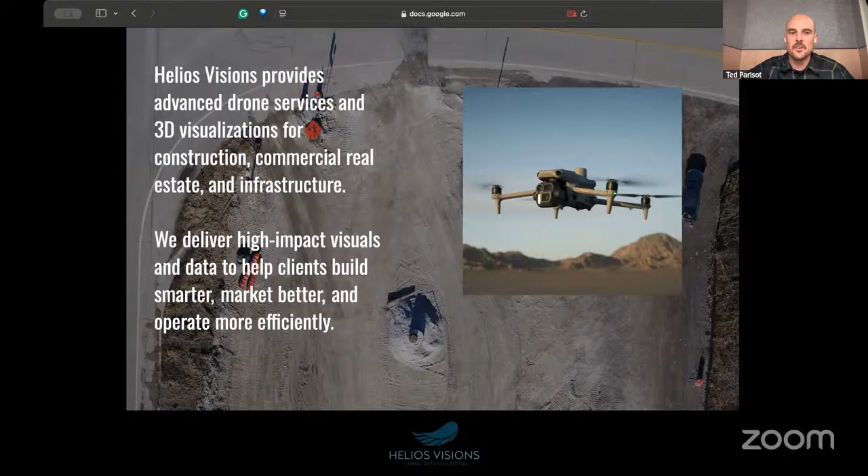So just a little bit about Helios Visions. We're an advanced drone services company. We specialize in 3D visualizations and inspections for commercial real estate, infrastructure, construction, and engineering. We want to deliver high impact visuals and data to help our clients build smarter, market better, and operate more efficiently.

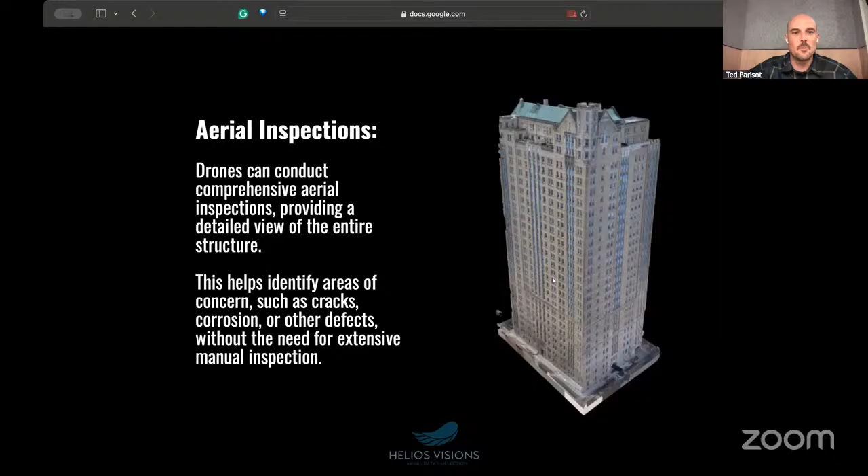So as you may know, drones are used very often for aerial inspections. The use has increased a ton over the last few years with the number of cities having facade inspection ordinances. Drones are really replacing or supplementing those inspections, being able to cover the entire building as opposed to spot inspections or only capturing a small part using traditional methods. So I'll show a quick video of a short view of what a drone-based facade inspection would look like.

This is a building here in Chicago, from a few years ago. That's the M300 taking off there, and we stay pretty close to the building, capturing images with enough overlap to create a 3D model. In this case, we're using photogrammetry to merge all this together, covering the entirety of the building.

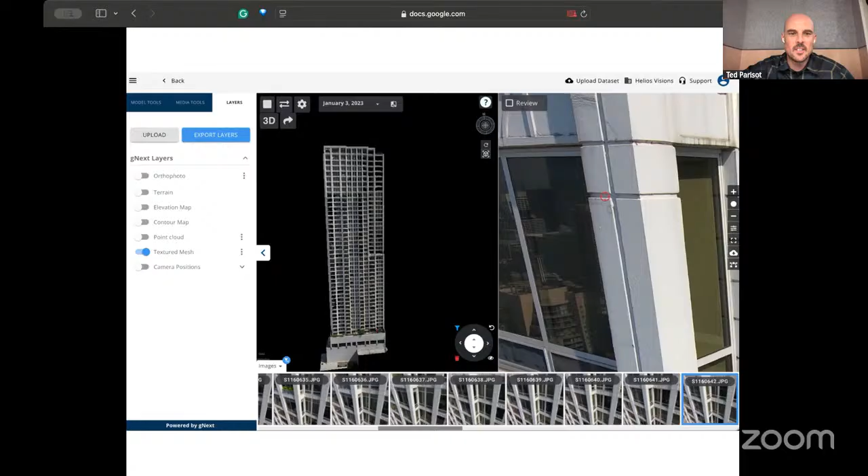Those images are used to create a large 3D model and orthomosaics, which engineers use to mark up the building and plan for repairs. Here's an example of this in a software called GNext. We're able to merge all those images into a large 3D model and then use that model to navigate the images, check conditions, make annotations and measurements. It's an easy way to assess the building without having to be on a swing stage, rope access, or lifts.

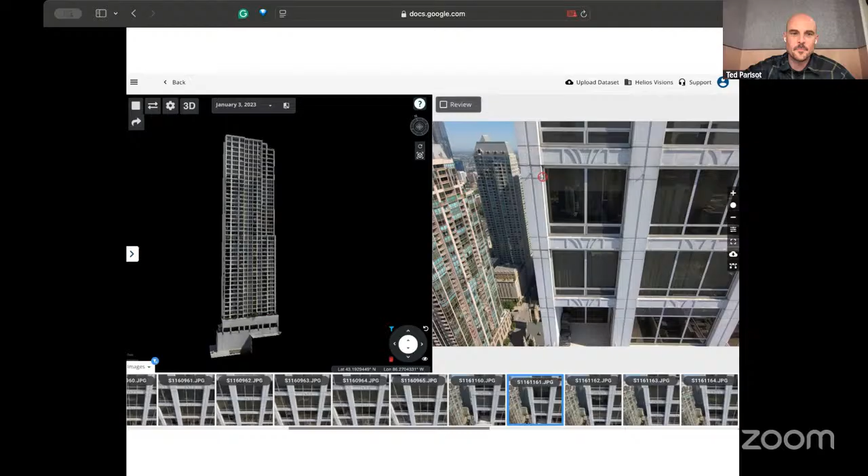Here's another example of drone inspection data of some buildings. You can see this is just a large ortho image, and we're able to capture this in a pretty short period of time.

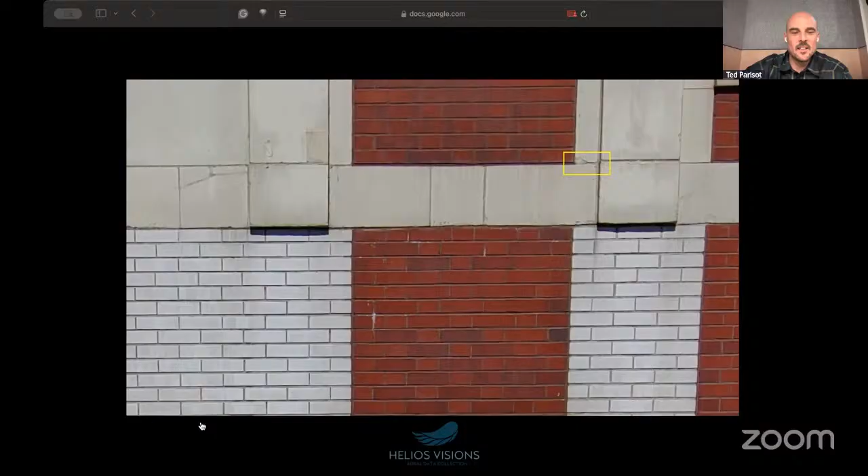Absolutely, yeah. A lot of these are flown manually. You can see here a couple annotations marking up some areas of interest. Most of these are flown manually -- we'll talk a bit more about some of the more autonomous missions, but we've flown most of these manually just to have total control of the drone, and the technology just wasn't quite there yet when these were being created. Technology has come a long way with GPS-denied drones, RTK, and other positioning technologies to allow us to fly in areas that in the recent past we really weren't able to capture or fly in.

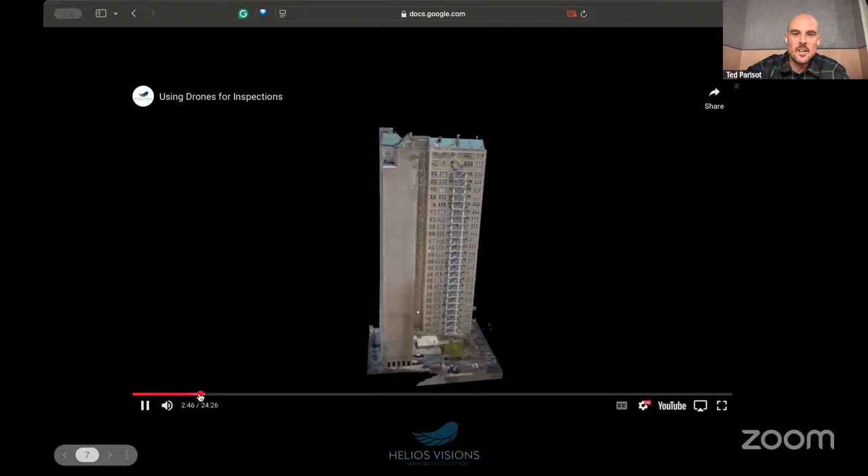Let's scoot over to another example -- this turned into a 3D model. Pacing through the images here, you can see as it follows along in the 3D model.

So there are just some examples of drones being used for these high-rise facade inspections. Here you'll see some of where the camera positions were and some of the flight lines.

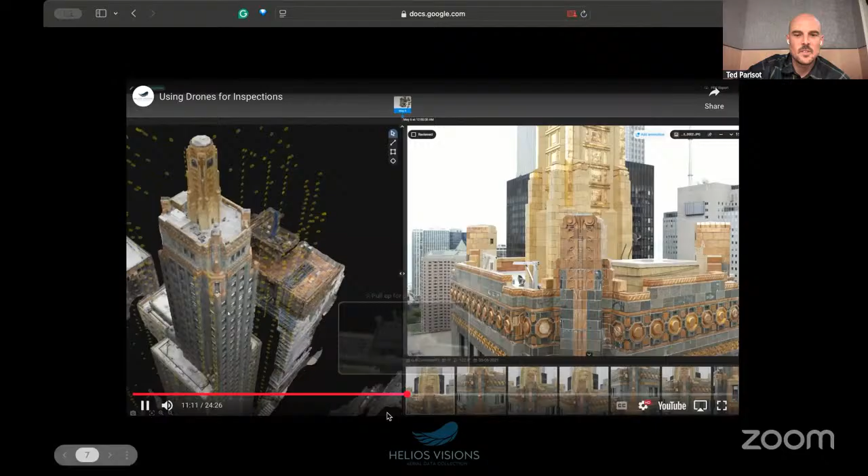One of the questions that came up in our chat is, are you using AI to identify anomalies during your inspections? Yes, we'll get to that here in a little bit and show you some examples. That's come a long way as well.

And as far as your flight planning, what about orbits? Are you doing orbits as well? Look at me, all these questions coming in already. I love it, this is great. It depends on the project, but yes, we're doing orbits. We're doing crosshatch, a number of different flight types to capture the data we need.

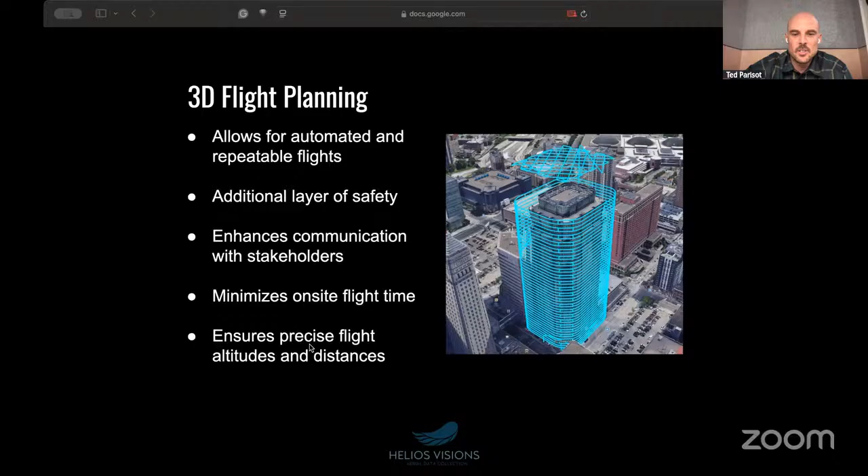This enhances communication of what is going to be covered on the building. It gives an idea to the pilot of the flight lines they'll be flying, and it ensures precise spatial resolutions, altitudes, and distances.

So here's an example of the one for the Pendry Hotel that we had just seen earlier. You can see some orbits around the top spire there.

And this is an example of the new Matrice 4E. The flight planning in there is pretty incredible as well. We're still testing the actual execution of the flight in some of these tight corridors, like buildings close to each other. But it's a really great tool for estimating times, number of images, and a lot of that stuff we need to know before conducting the mission.

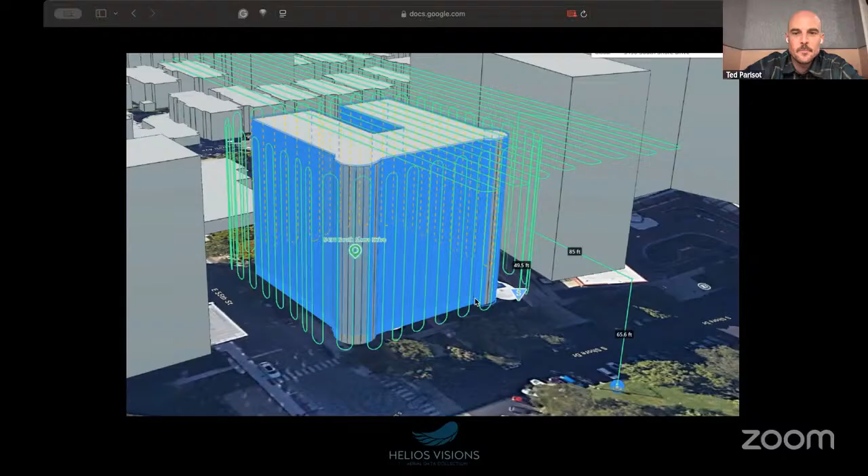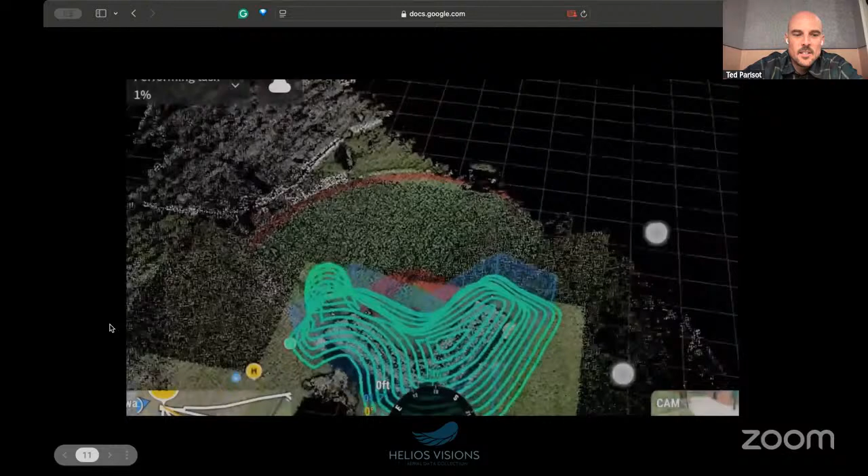So this is just a sample, the first one we've done with the M4E in terms of the advanced 3D capture, of a small baseball field here in Chicago. You can see it does a pre-flight to identify the structure, and then it'll go in and use that data to do a more precise scan of the building. You can see some of the images being captured there.

And then just a small example of the output here. You can see there's a couple holes in some of the metal, and some other manual shots may be required. This here isn't even really part of the focus, but it was pretty impressive what it was able to capture in terms of the photogrammetry processing.

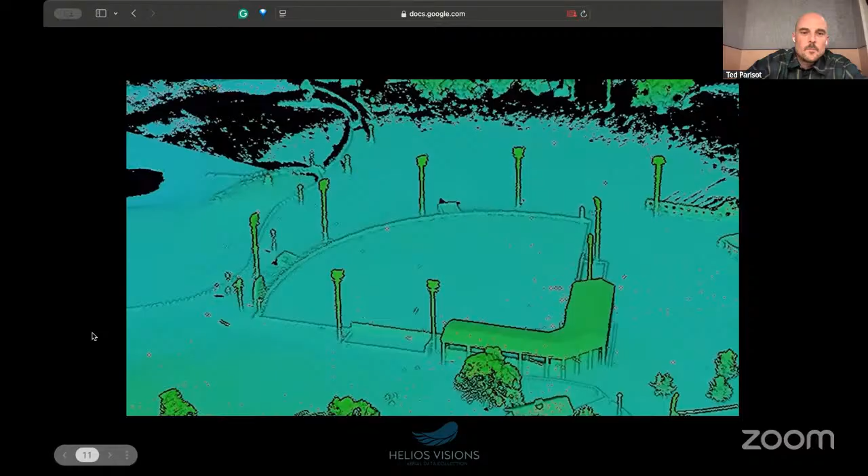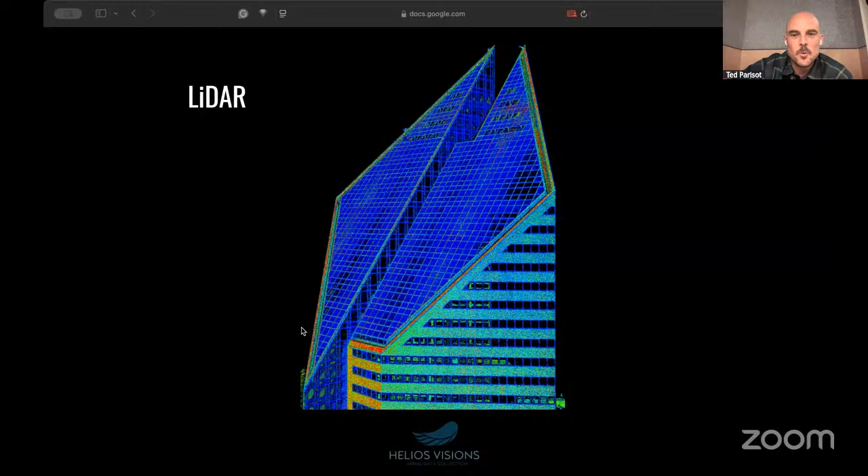And then we'll talk a little bit about LiDAR on drones, very exciting stuff. A lot of it has been more based on capturing ground. We've also started testing LiDAR on buildings, particularly glass buildings. This is a pretty iconic building in Chicago, shot with the L2. There was some time needed to calibrate, but we had a lot more flight time between calibrations than on the L1, and this building was just about the size we were able to capture between calibrations.

We have a couple more questions if you want to address them. All righty, okay, please. Do you use the Matrice series drones, or can you use something like the Mavic 3 Enterprise series in tight spaces?

So when you're in those tight spaces, are you able to use the Mavic 3 Enterprise? We are using the Matrice 4 for that. The Mavic 3 has pretty okay obstacle avoidance in those conditions, but the M4 certainly has better visual navigation. And now they have a LiDAR attachment on that drone which we have yet to test, but in theory it's supposed to identify wires and things like that. I think it's made for substation inspections, and we do intend on using that device for building inspections to give us better navigation in those tight areas.

And can you tell us if that's a mechanical shutter? Yes, I believe so. Yes, the M4E is made for mapping and photogrammetry and all that good stuff. Okay, awesome.

Charles had asked, are you seeing the size get smaller and the prices dropping with LiDAR? 100%. Yeah, this has really allowed us. I agree 100%. It's really great to see. We've been waiting a long time for this.

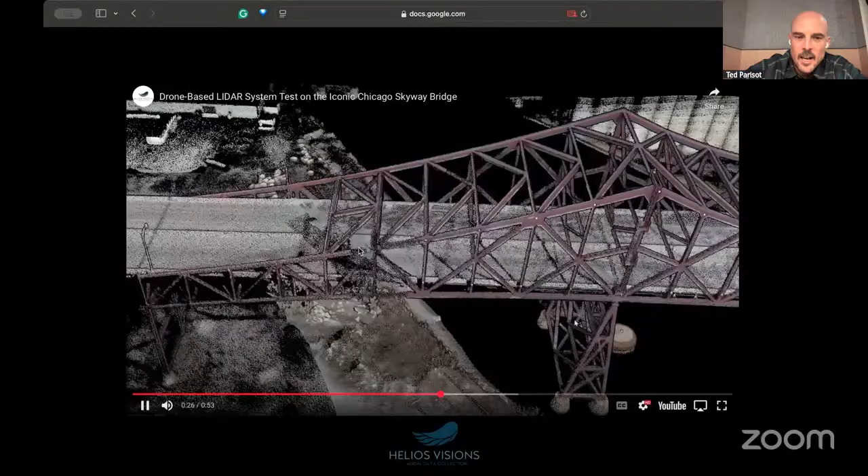Certainly other tools can be used to capture this stuff, but you can see here a little gap, and some of that was just the flight itself. But pretty impressive with what we're able to do now with some of these LiDAR sensors.

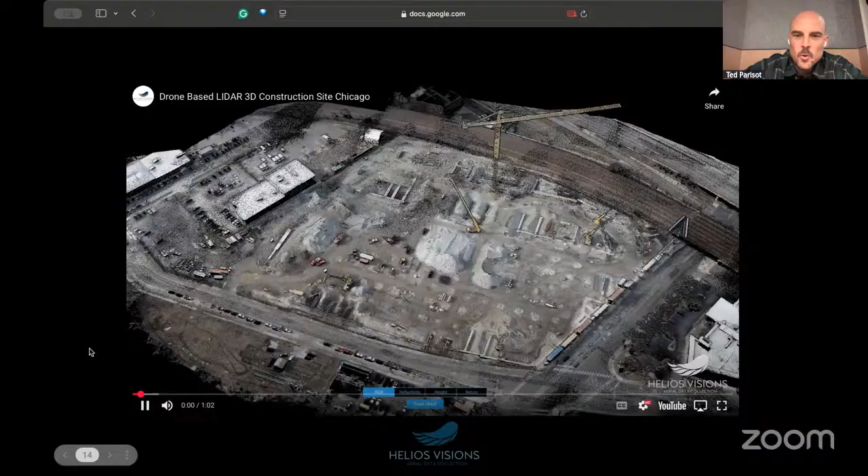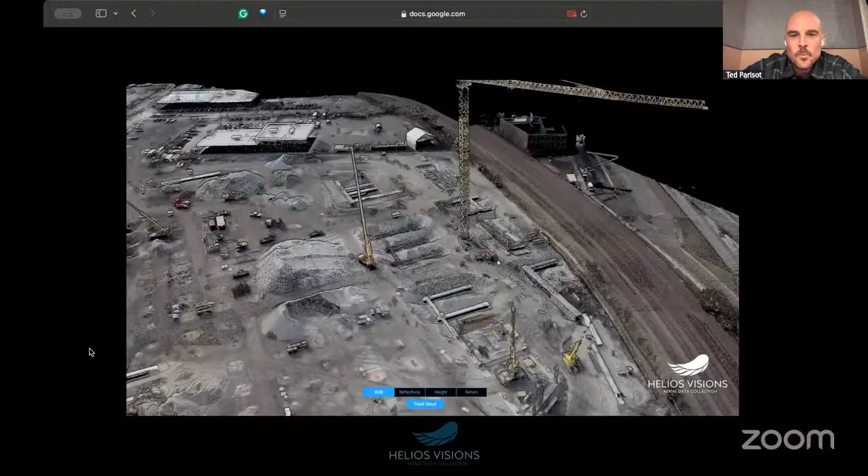Let's see here, next, there's just a quick one. This was a top-down shot using LiDAR on a job site. This is also the L1. After using the L2, there's quite a difference in this.

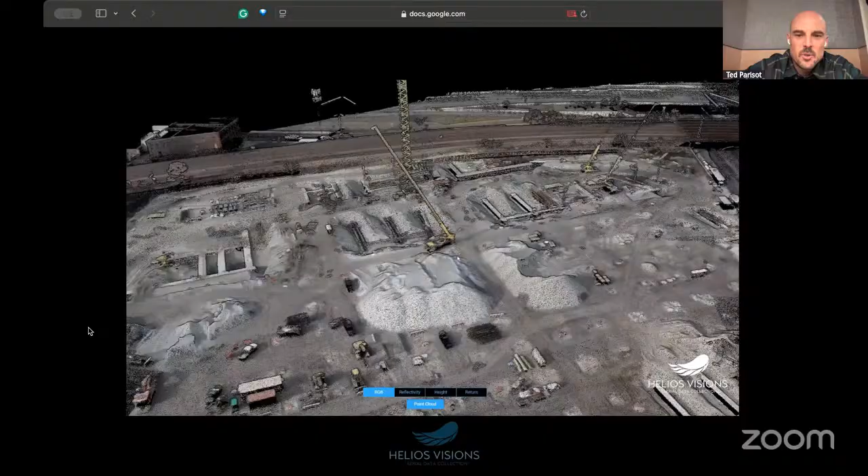There was no oblique shot here or any side angles, so you'll see a little missing data in the crane and some of the other areas. But to capture large scale sites like this very quickly is very impressive. Get some great stockpile measurements using the LiDAR.

Not a lot of post-processing required for the LiDAR data as compared to photogrammetry, which is also nice. Certainly different use cases in a number of ways. But yeah, you'll see here, it's the RGB view.

Scoot us over to the end here and we'll see a bit of the final. So right after landing, we're able to see, let's see here, right after landing, we're able to see what was captured, verify. So just a nice feature. Zoom out here.

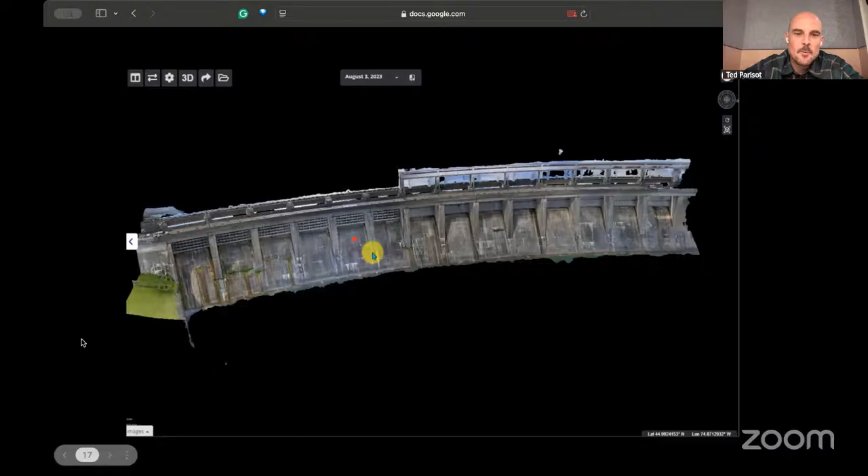And then, yeah, going to jump to a bit of the AI analysis of drone data. With the building inspections, and this in particular is a dam inspection, this is all built using photogrammetry. You can see a number of different conditions just with your eye. But with AI, it's going to start labeling different conditions, cracks, spalling, etc. And then this also getting bounced out to CAD, which is extremely helpful as well.

So when you're talking about the AI aspect of the software, is that portions that you've trained it to identify, or has that been a component of the software already that's built in?

Yep, that's part of the software. We certainly can create custom models, but there's definitely becoming a standard of conditions. Cracking, obviously, exposed rebar, a number of them have just really become standard conditions. So those models are getting trained and just getting better and better as we go.

Oh, we love technology. Yeah, AI is touching every part of this, from the flight navigation to the post-processing. It's really incredible to see the application evolve over time.

So once you have your footage and this data that you've collected, how about that processing side of it? What type of equipment are you having to use? Because I know LiDAR is really big and bulky. What type of equipment are you using in that aspect?

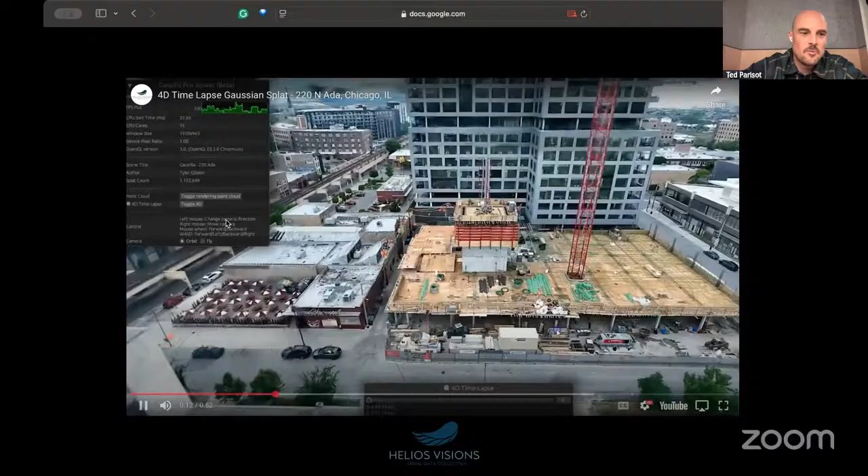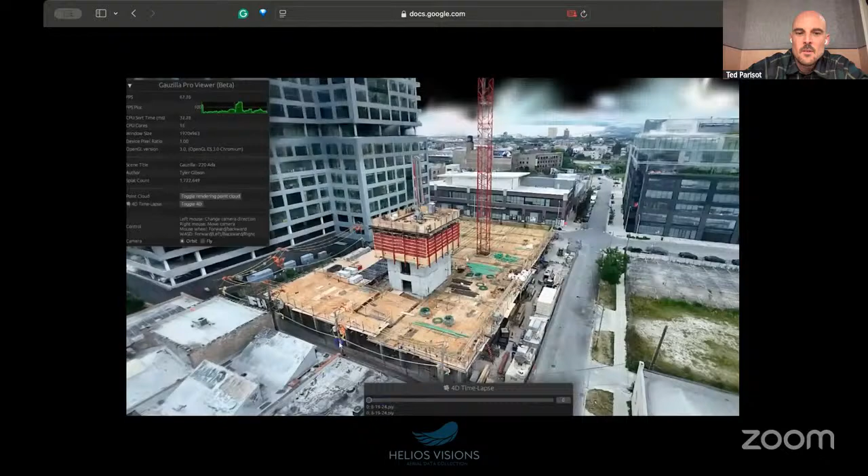Jump to another example here. This is actually a 4D — I think they're changing the language around 4D in the Gaussian splat world — but this is a time lapse of multiple Gaussian splats over the course of a few months, and we're able to line these up. This tool is called Gauzilla, and it has some other AI enabled elements as well. We're able to capture, process, and merge these all together in a relatively short period of time compared to other photogrammetry methods.

So a question in our chat came up again, a couple more. Good time to ask them if it's okay. With the new technology, what is the cost compared to previous programs?

There are definitely free open source tools for Gaussian splat processing, which is awesome. There are a number of web viewers as well. The cost for this has definitely dropped, and it's a lot easier for people to get involved in this than maybe photogrammetry, just from a capture standpoint and from a software standpoint.

For some people that may not be familiar with Gaussian splatting, can you explain what that is? Yes, so it's using AI to create 3D representations of the area that you captured. We're typically using video for these. We're flying video, extracting images, and processing that into the 3D models. We also use images, but video really covers a lot of the area that we need.

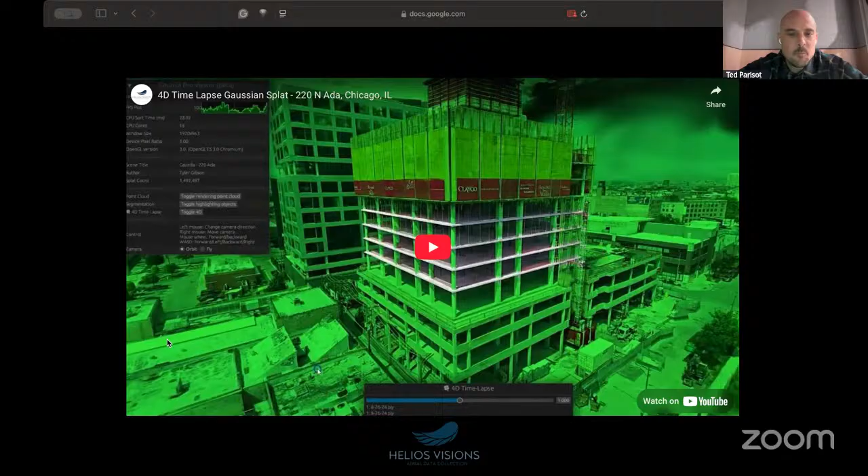What is the accuracy of the measurements in this perspective? Early on, this was just a visual representation, a pretty picture essentially. Now there are techniques people are pioneering to actually use control points and have accurate visualizations of the Gaussian splats, which is exciting. Because a pretty picture is a pretty picture, but if we can pull accurate data from these, even better. There are a number of tools out there now combining LiDAR and the Gaussian splat technology — skipping the photogrammetry piece for the geometries, basically using a LiDAR point cloud and then texturing it with the Gaussian splat, which is very exciting as well.

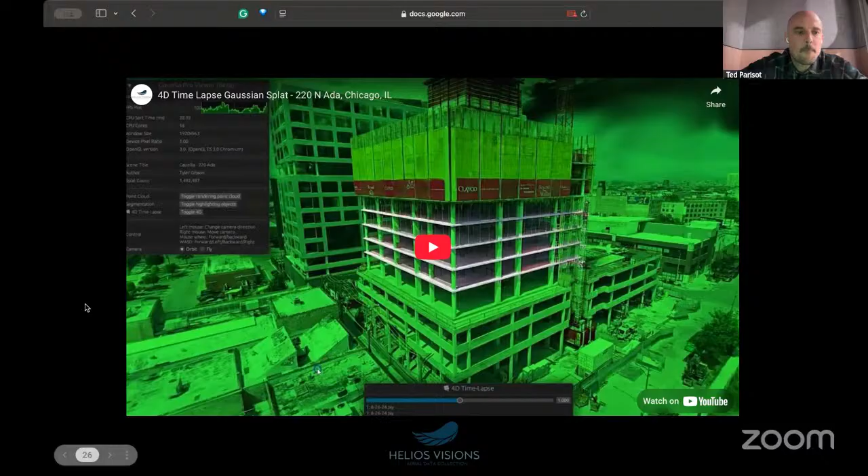Awesome, good questions in the chat. I love this, keep the questions coming. John asked the next one, which was definitely one of my questions as well — tell us a little bit about your workflow, from using the software on the UAV to the client deliverable. If you could share a little of that.

Yeah, definitely. There are a few different ways to go about it depending what you're trying to do. A lot of times we'll end up with the final output just being a video, an animated video, but also you can view these in web viewers. We start with the data collection — similar to photogrammetry, you need to overlap and cover a sufficient amount of area of the subject.

Then we bring that data in — if it's a video, we'll extract the frames and bring it into a software called PostShot, which is one we use often. I believe there's a frame extractor in there. That's processed, and then we'll bring it into a web viewer, or do animations within PostShot. Bring it into Gauzilla, another tool for viewing. Super Splat, I think, is the name of another one — I think that's the open source viewer. Pretty cool.

There's a few open source tools out there. I should have been writing those down, trying to keep up with you and find their links, but we'll drop some links in the chat a little later and get everybody caught up on some of those. Definitely some cool tools to explore.

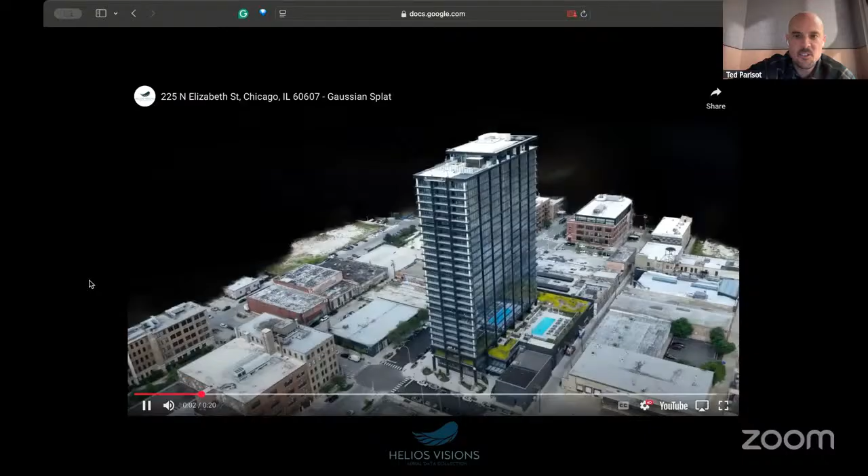So here's an example of the splat itself. It's a building in Fulton Market. You see the nice reflections, it's capturing the pool, some light poles, etc.

And so what we did was we brought this into Autodesk software, and my partner ended up dropping in this building here in the middle, which is just a 3D rendering. We're able to show that we can bring Gaussian splats into these tools, and the really cool part is you can see the reflection of the Gaussian splat building on the rendered building. That's a very cool advance we've been able to work with, that we're very excited about.

Wow, very impressive.

All right, so enough about Gaussian splats, we'll move into drone in a box stuff. Some more cool advancements in the world of automation and waivers and all sorts of cool things.

I'm sure you're all familiar with the drone in a box. They've been around for a little while, and they just keep getting better. I think the newest Dock 3 version can go on a vehicle and has a bunch of other really cool features. It's used in construction, solar field inspections, mining operations, security for college campuses, security for logistics centers and warehouses, and it really allows for 24/7 monitoring of these assets.

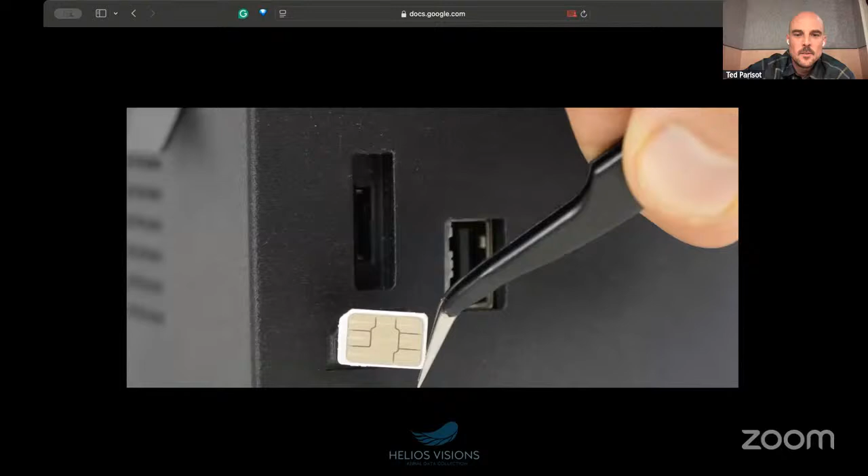A lot of this stuff has to do with security and keeping that data offline, but also just being able to use it immediately, so again, not having to post-process. This is even loaded into the controller itself. Pretty cool stuff, plugs right into the dock.

Very cool advancement in the AI world.

So we have a couple more comments in our chat. John had asked, what was the construction waiver? I'm sure Vic will know more than I do, but category 3 drones are the drones that can be flown over people within a closed or restricted access area. You would be able to go through and get a waiver or authorization for that, and you file that.